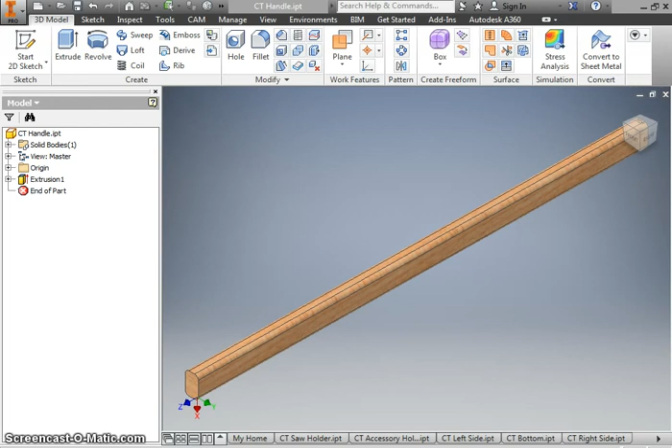Now that we have all of the parts, we're going to start to make an assembly file. Go up to New, Assembly, Place, and we're going to place in all of our parts. Click anywhere, and it'll switch it to an ISO view where you can see everything.

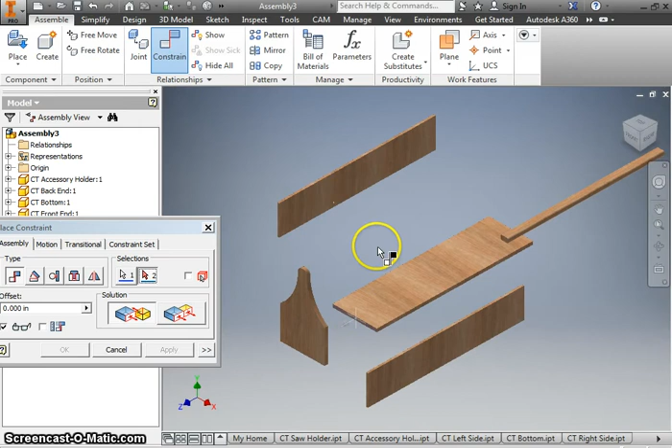We are just going to start slapping this all together. So let's start with a mate constraint, mating these two faces together. We want this edge to be flush with this edge. And if we look at the bottom half, we want that to be flush with that.

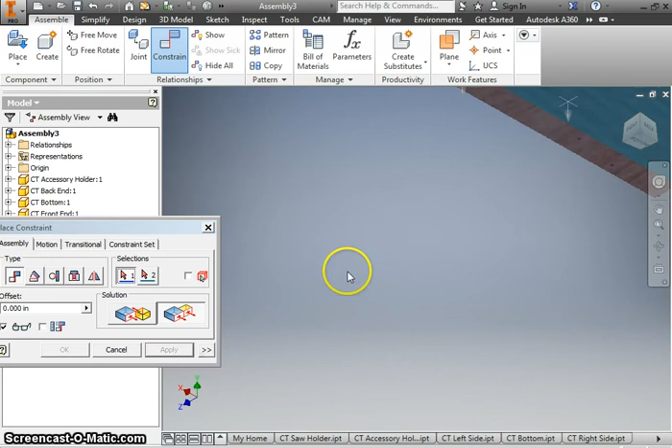We're going to say the same thing about this one. That has to be flush with that. This edge has to be, oop, not that edge. This edge has to be flush with this edge.

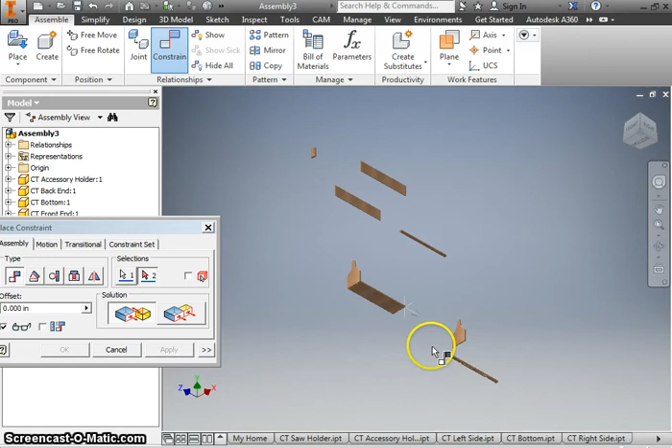And then we need to make a mate constraint with this face and with this face. Now that those are in place, we're going to do something similar with this. We're going to say that that edge has to be touching this edge. I don't feel like flipping it around, so I'm going to say that this piece has to be touching that piece.

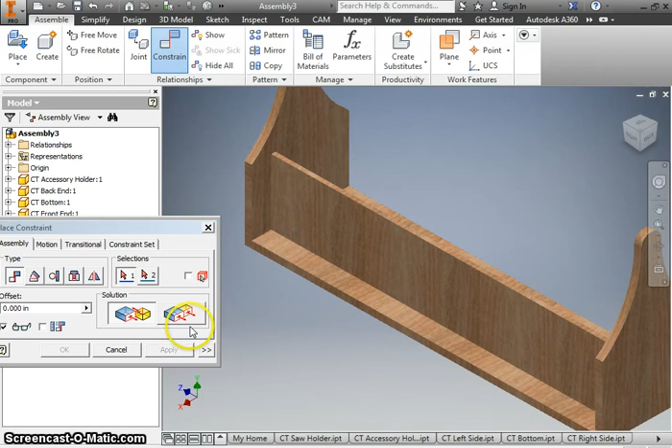And this is the right side, and it says this is the right of my block. So I'm going to make sure that this is flush with this side here.

Okay, let's take a look at the back side. This one does matter with orientation because there's a little hole on it, but if I don't want to flip everything upside down, I can just click on the top of this and say that is flush with the top of this one.

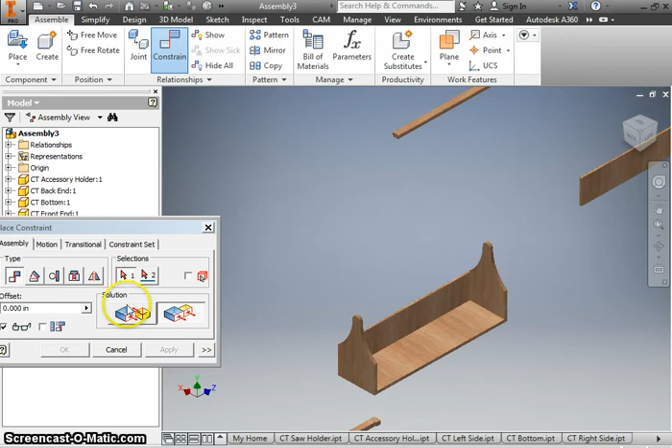The edge doesn't really matter here as long as that part's on the bottom. So we're going to say those two are matched up. And then we're going to make a flush constraint with this outside face and this face here.

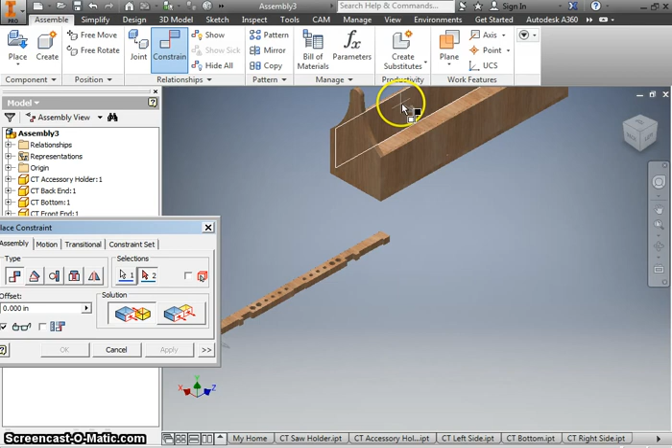We have our accessory holder. This is going to be a flush constraint with this. It needs to be flush.

You know what? Let's switch it to a mate constraint. We'll get this edge here, mated with one of these edges over here, and then we'll make this flush with this. Okay, so that slaps in there like that.

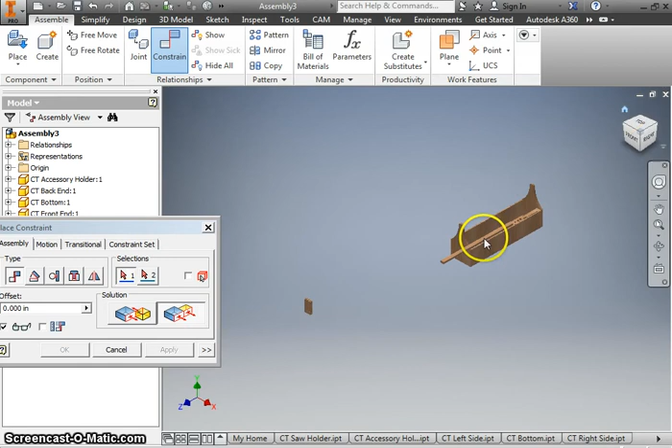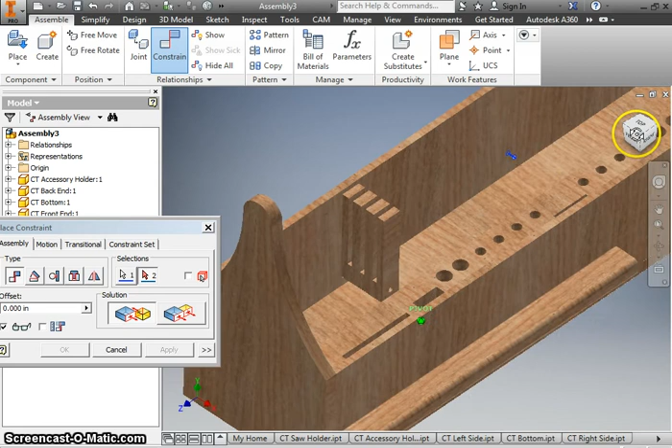I have a mate constraint where the side of this is going to be on this side of the box. And we're also going to use this little hole that we made and say that axis, so if you hover over the round part, this line will light up. That axis lines up with this axis. And again, you hover over the round part and you'll get that line.

And we made the axis so that this can pivot. Let's click on the bottom so it highlights blue, right click on it, go down to grounded, and now this box can't move around, but things that are ungrounded can.

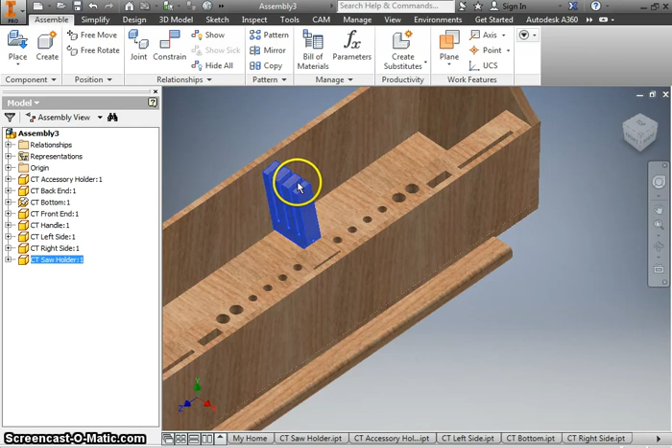There we go. And the last bit is the handle, which I thought we saved the right orientation. I know we saved the right orientation, but it's still messed up. C'est la vie. So that has to be mated to this.

Those two things should be touching. And we're going to make an angle constraint. It's a directed angle, which means that these two things should be facing the same direction.

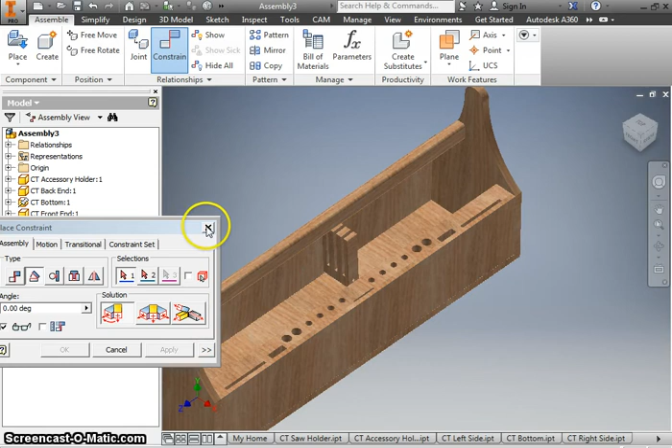Probably would be nice to have a way to mate this right in the center. And the easiest way to do that is if we click on one of these guys. Let's go into the origin folder and make the plane that goes down the middle visible. Click on this one here, find the origin folder and the one that goes through the middle of that, make that also visible.

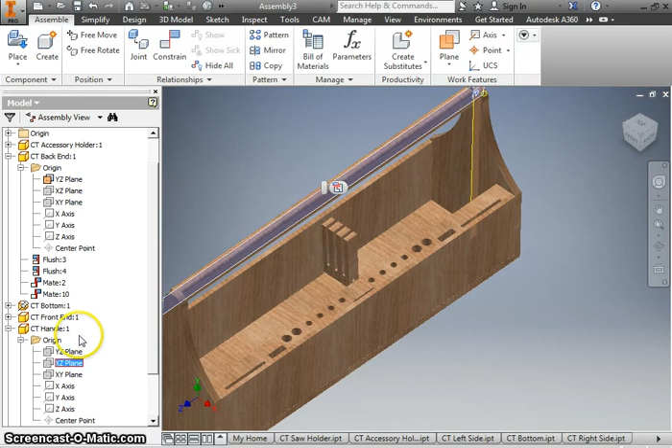I can't see it. Come on. Oh, fine. Well, let's double click on the part then. There's visibility. Yes, let's save it.

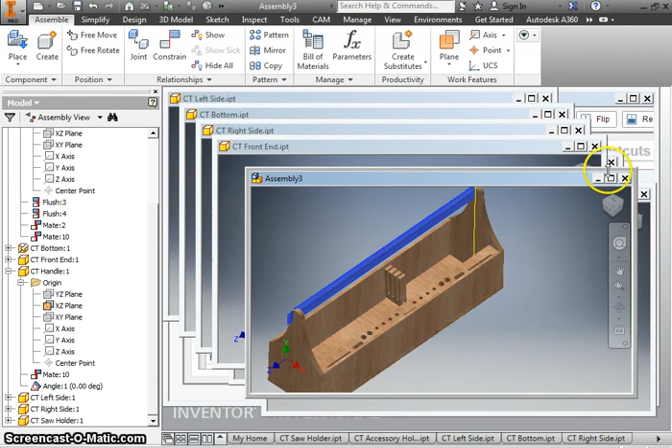And just to make things easier, I'm going to close out the windows that we're not using. And you'll see why in just a second. Should be everything that we're not using.

Okay, so now that I have the planes visible, I can say constrain, and I will mate both of these planes together.

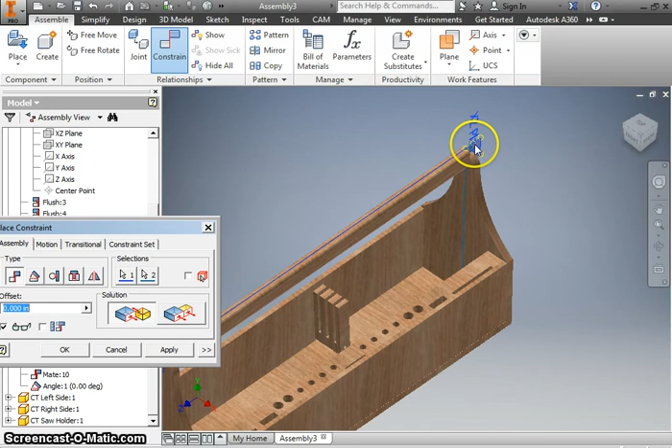And we need to figure out a height for this guy. The easiest way is just going to be to say that I'm going to mate the bottom of that to this part here.

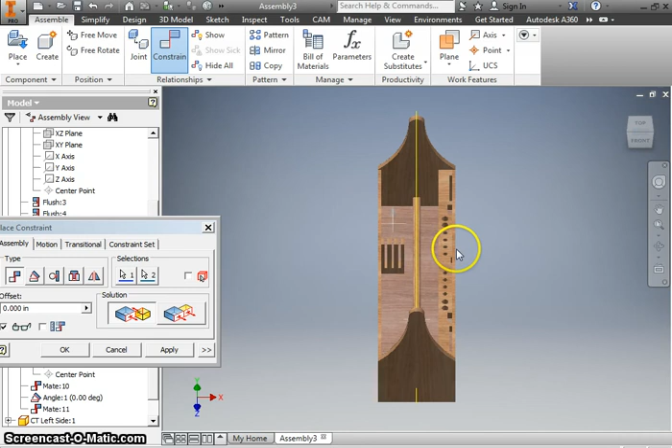So now if you look, it's actually inside of the box, which is not quite what we wanted. So we're going to say it has an offset of, I don't know, let's try 12 inches. And 12 inches looks pretty good to me. So we're going to hit apply there.

I don't like these yellow planes, so I'm going to right click, uncheck visibility. Then we're going to turn off the plane on this one. So we click on it to highlight it, right click the plane, uncheck visibility, and we can collapse those back down again as well.

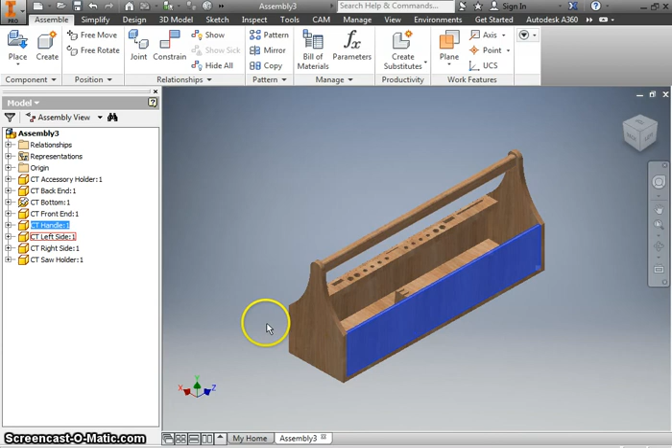Okay, so there's all the assembly, kind of. What you're still missing is that this all has to be put together with fasteners. It's not just wood glue. So we need to show where those fasteners have to go.

We're going to modify each of the parts by just double clicking them. Now I can make a new sketch on it. Right click, new sketch. Right click again, I can project geometry.

And I want to see where that handle would be located with the constraints we have. Okay, so there it is.

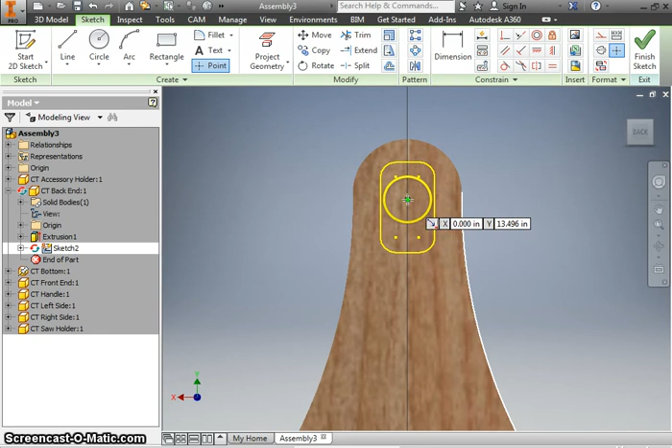And we're going to put in 2 screws, one at the top, one at the bottom. So I'm going to put in a couple of points. And if I know that this whole handle is 1.5, and there's 1, 2, 3 spaces in there, I can say from here to here, it's going to be 1.5 divided by 3. And here to here is going to be that same number. It's a 1/2 inch. Okay, we're going to finish our sketch and make a hole.

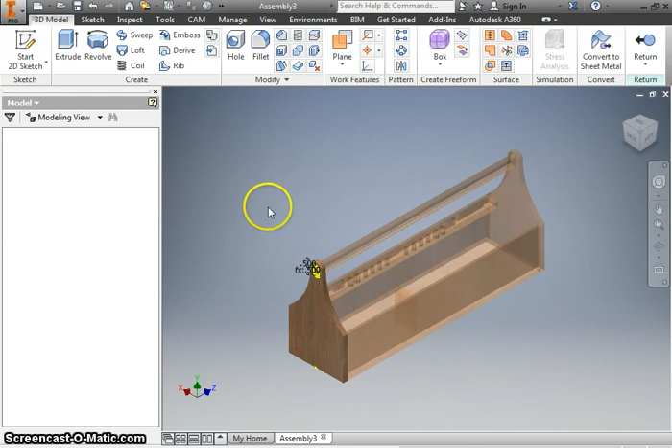And when we just click hole, it's going to pick both of those points. We want this to be a counterbore hole, or I'm sorry, countersink, so it has like a V shape to it. And this is going to go through all. 1/4 inch looks good. Actually, let's make it 0.125. We'll use some skinny ones, 1/8 inch. Okay.

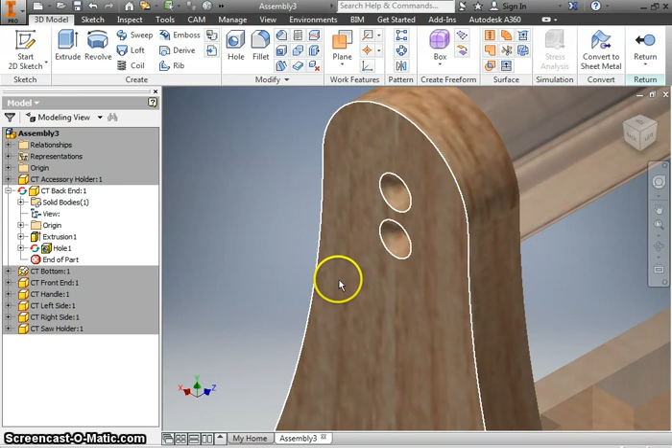So that looks good. But we need to also make adjustments to the handle. So, in case you missed that, we were on this part. I clicked return, double click the handle. Now I can right click the face and make a new sketch on the handle. Right click again, we're going to project geometry.

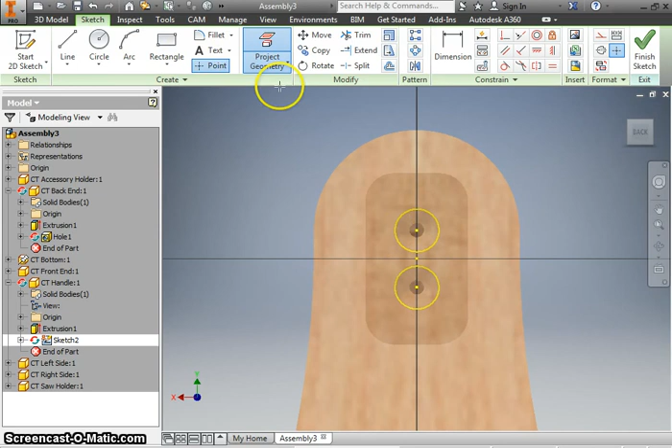We can use exactly where those holes are, as long as we put center points where the points would be for the centers. Then we can go back up to hole, and this time it's going to be not a through all, but a distance. We're only going to have it go in 1 inch, and it's still an 1/8 inch diameter hole.

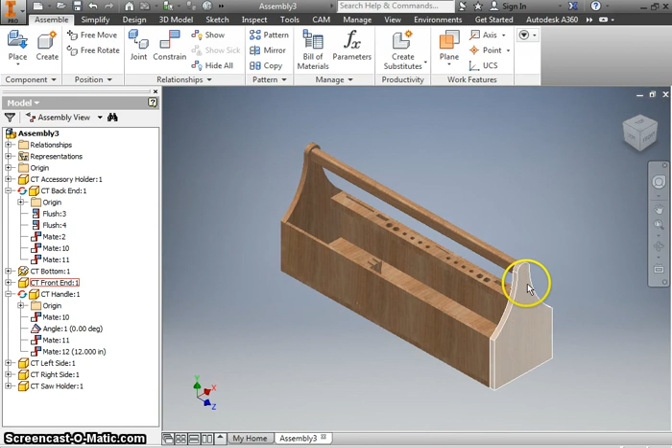Okay, so now we have a way to fasten this on this side. We made the front and the back different, so when we go on this side, it's going to be facing the correct direction. New sketch here. Project geometry, same thing we just did to the other side.

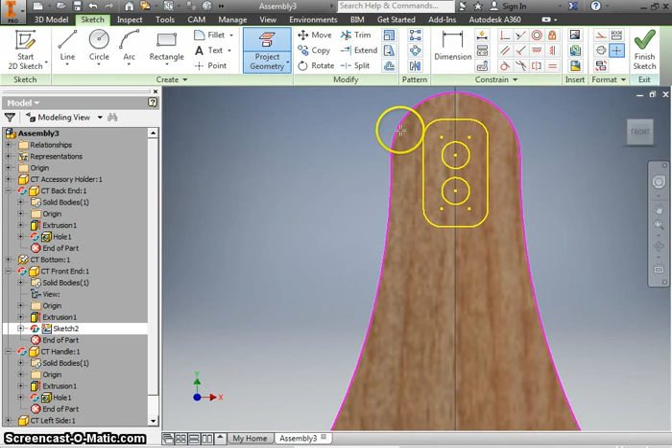But because we already did it to the other side, we can see where those holes were, so this should save us a little bit of time. Again, make the points, choose hole, change this to through all, make that a countersink, 0.125.

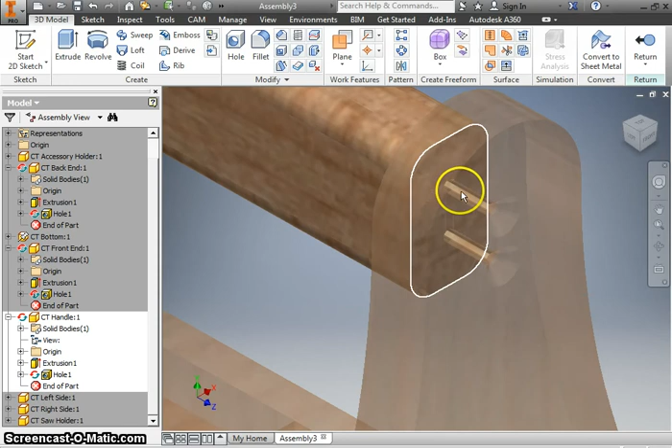Return, double click the handle, right click, new sketch. Project geometry, we want the two holes that were there. Center points on the middle of the holes. Change this to distance, 0.125, goes in 1 inch. Looks good. Okay.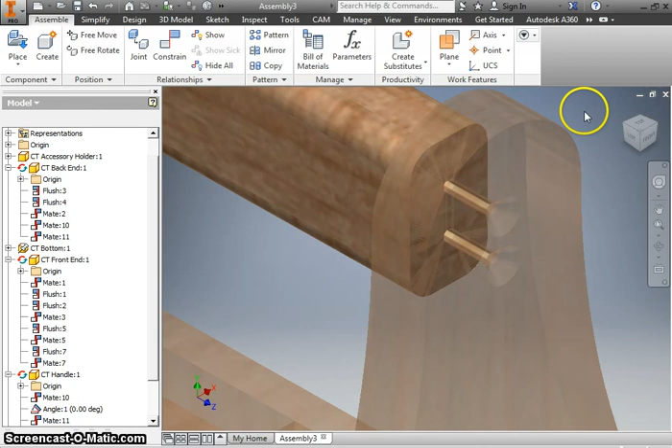So now we have two holes in the handle, a way to hold it on. We have to find a way to hold this thing on. So let's make another sketch on this. Double click to open it up, right click, new sketch.

Let's find where exactly that is. Looks like it's there. I'll put in 2 points. This is 1.5. 1.5 divided by 3 is a 1/2 inch. So this is going to be a 1/2 inch from this side, 1/2 inch apart.

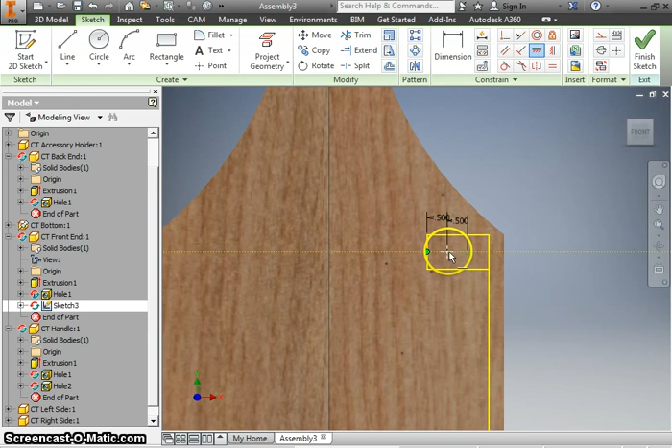And we want this to line up with the middle of this, and to line up with each other. Hole again, it's a countersink, and it does go through all.

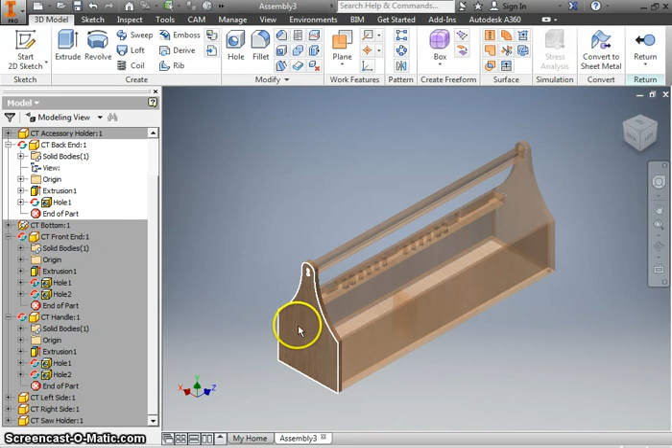Return, take a look at the other side, new sketch. We should already have those two holes. Add points to the middle of them. Finish your sketch, select hole. That all looks good still.

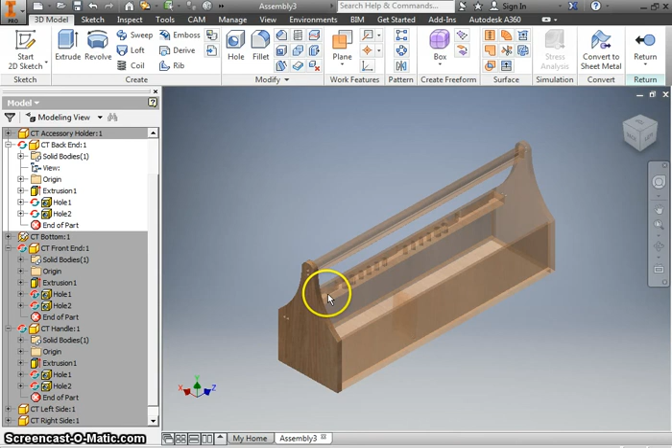Return, now we just have to modify this piece. Right click on the ends. Project geometry, point. Finish sketch, hole. Change this to distance again. Make sure it's 0.125.

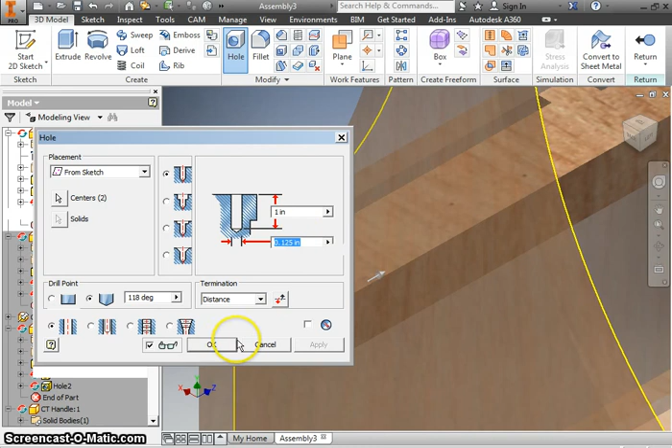New sketch on this face. Project geometry, point, hole. Distance of 0.125 looks good to me.

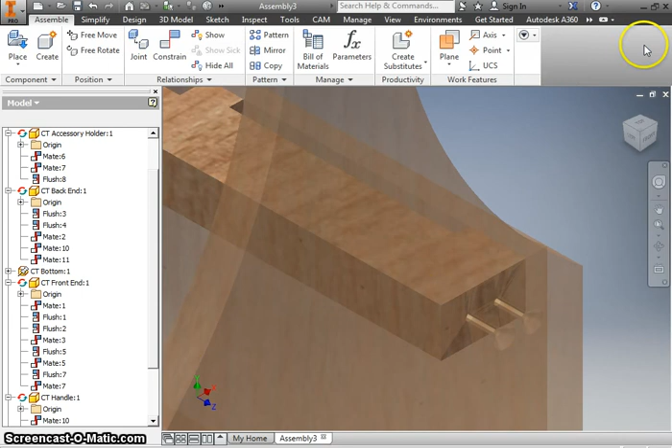Okay, and then the only thing left to do is to make ways to attach the sides and ways to attach the bottom. We're going to make that in the next video.